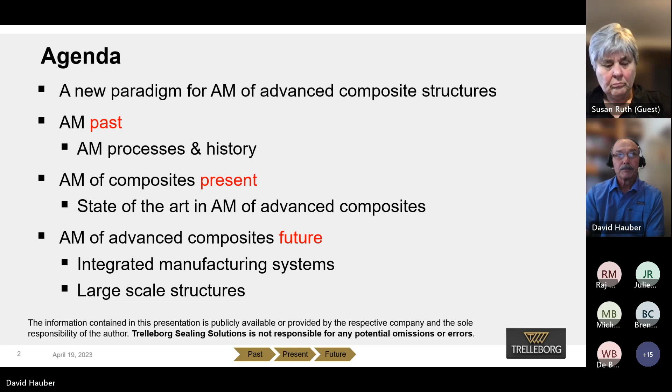Back in the late 70s, early 80s, I was an electrical engineer working in robotics research at Rensselaer Polytechnic Institute. Sikorsky came to us and wanted to know if we could use robots to make composites. I didn't know anything about composites, and it was a love affair. I couldn't believe the capabilities of composites, but the processes were awful - it was all manual layup at that point.

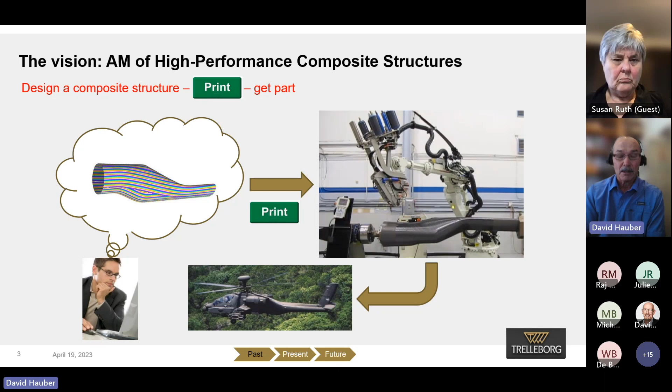So we spun off a company called Automated Dynamics, and my dream was to design a really cool composite part, push print, and get a part. I'm happy to say that after 40 plus years, we've made some progress here.

In the early days, handwriting, hand layup - this is what I discovered. The thermoset hand layup in the early 80s, and I thought, wow, there's got to be a better way than this. It was awful. So probably the best invention ever was the letterpress, which is simply a wine press and movable type, and it transformed the world.

Similarly for composites, it's manipulator-based, automated manipulation of the composites to make a structure. Then flatbed plotters or printers - with your computer, you can write a book or a paper and have it printed. Likewise, we can now print simple composite structures with automated fiber placement, especially with thermoplastics.

I quickly realized that thermoplastics were the future back in the 80s, and I'm happy that the rest of the world is finally agreeing. I think I heard a moan there.

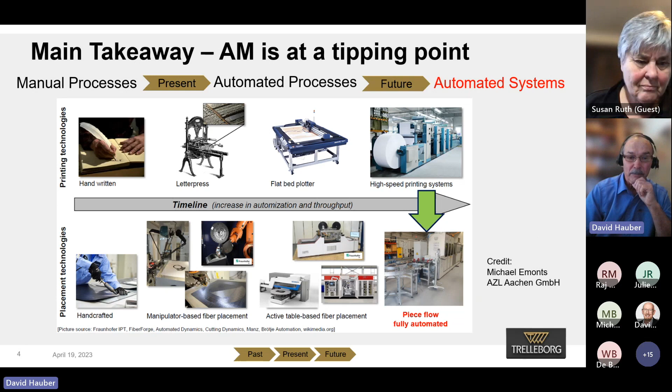A little history of additive manufacturing - I don't want to bore you here. These are the six original additive manufacturing technologies. I actually played a role in material jetting and directed energy back in the 80s.

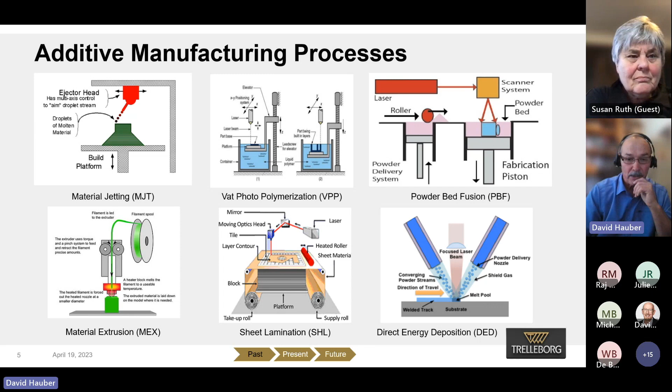These are the original patents from that time. I was working on this - I got an NSF grant to develop what's now called direct jetting.

I was doing a presentation at a conference, and this guy, Bill Masters, walked up to me and said, 'That's interesting, I have a patent on that.' And he did - it's amazing. So this is the original patent for what we now call 3D printing or additive manufacturing.

And these are the other technologies - Chuck Hull of 3D Systems with SLA, Carl Deckard with SLS, which was later acquired by Desktop, by 3D Systems. And Bill Masters invented fused filament fabrication.

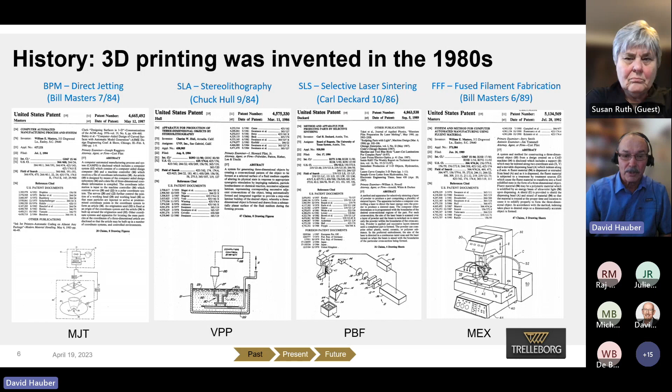So you'll notice a theme here - Bill Masters. Bill and I are still friends today. I handed over all my technology from this direct jetting, which I called BPM, and he named a company BPM and actually built and sold printers. It's no longer in business.

He also invented FFF, fused filament fabrication. A lot of people think that Scott Crump invented it, including Scott Crump himself, who thinks Stratasys invented FDM. The reason Stratasys says FDM and everybody else says FFF is because Stratasys trademarked 'fused deposition modeling' - it's the same technology, melting a filament and creating 3D structures with it. So by any measure, Bill is the inventor of additive manufacturing, and Wikipedia just recently corrected that.

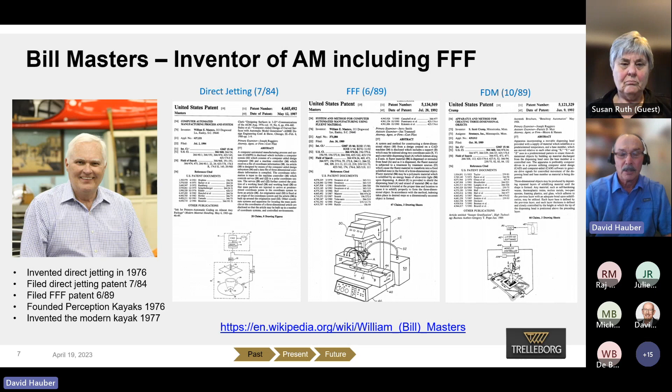Bill also invented the modern kayak - he just sold, a couple of years ago, his Perception and Aquaterra kayak companies. So then the last historical 3D printing technology is binder jetting.

Eli Sachs of MIT simply combined material jetting and powder bed fusion. Simply, I say, but it was a major breakthrough. I thought it was genius. He just combined these two technologies to solve problems with throughput and different materials.

With binder jetting, you can do everything from ceramics to polymers, metals. It just requires a secondary sintering step. You bind the powders together, then remove the unbound powder and sinter it. So it's not exactly push, print, get part. There are post processes, and so be it. It's still additive manufacturing.

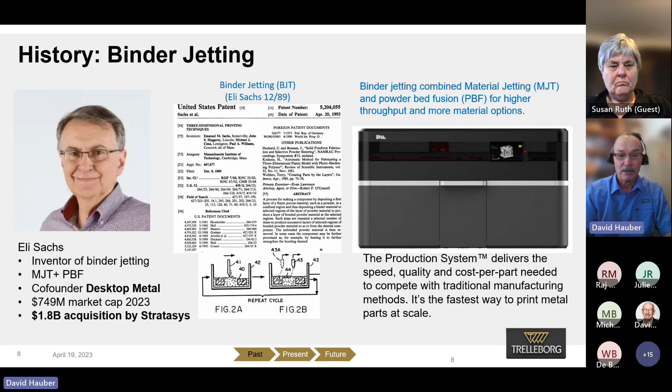Eli also co-founded Desktop Metal, which I'll get to in a minute. If you're following the news, Desktop Metal has a $750 million market cap, and they're being acquired by Stratasys for $1.8 billion. Their EBITDA is negative, so something I don't understand here, but it's a huge buyout.

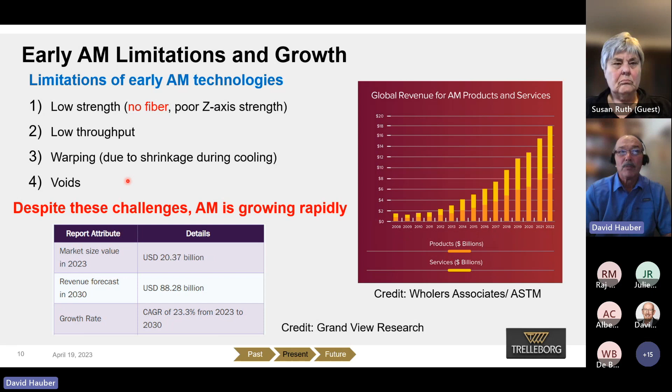So now we go into where we're at today with additive manufacturing of composites. Despite all the limitations that I saw early on, this industry is just exploding. It's growing at over 20% per year. It's a $20 billion business right now. However, it has problems: no fiber, poor Z-axis strength, relatively low throughput, warping, voids. But despite all that, it's growing exponentially.

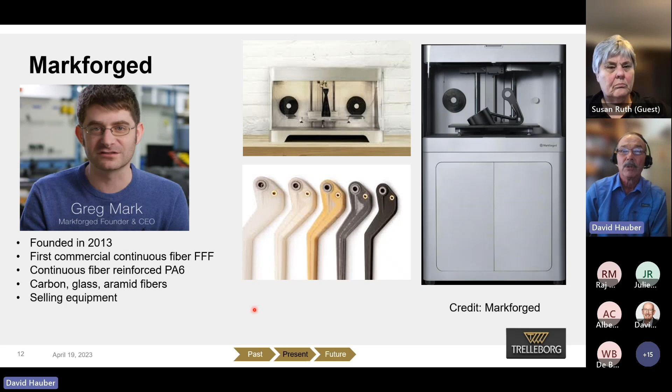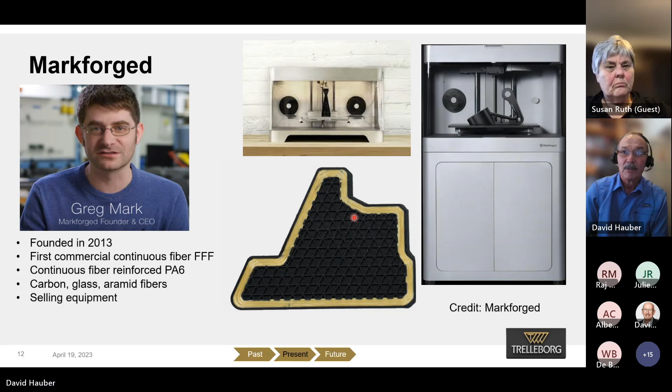Greg Mark was the first to introduce a fiber printer. Like I said, it's very low fiber volume. It has a very, very long minimum fiber length, and you can see us composite people understand that this isn't very pretty composites, but it's better than plain polymer or even chopped fiber.

So Arevo started making real in situ consolidated printers, originally founded by Hemant Bheda, but Sonny Vu, a Silicon Valley venture capitalist, bought them. They originally sold work cells, and now they only sell parts. They basically make bicycles with this technology.

They stole one of my engineers, and he designed a little mini in situ consolidation head with laser heating, and built these little work cells with a robotic arm. They can't make these bicycles fast enough. I'm told they have 72 of these work cells making bicycles in Vietnam, and they're expanding into other countries now. It's just amazing to me.

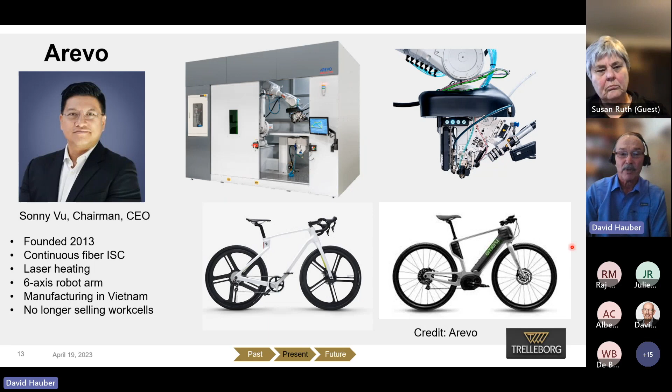I'm not very enamored with this e-bike here, but I kind of like this design. So it has a 3D printed frame, and this one has 3D printed wheels on it too.

Anisoprint is based in Luxembourg, and they started with really advanced FFF fiber reinforced printing in 3 dimensions, but now mostly they just sell 2D layered printers. They weren't making as much money with this technology as they are with this technology, so they're selling more or less printers, but continuous fiber though. They do have continuous fiber capability.

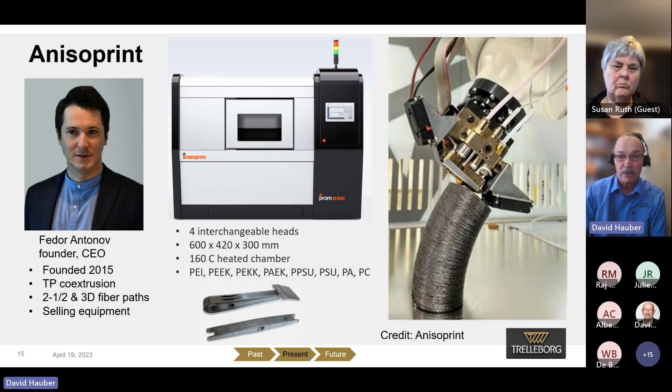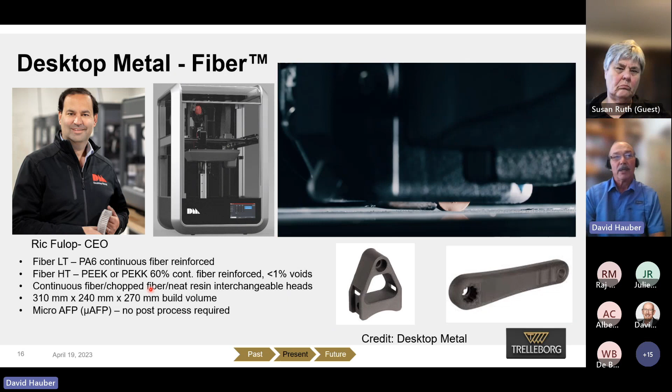So Desktop Metal, this is Eli Sachs' company. He was a co-founder with Ric Fulop, and they do mainly binder jetting, but they acquired a company called Make Composites that Konstantin Fetfatsidis created, and Konstantin helped them to build this printer, which we own one of.

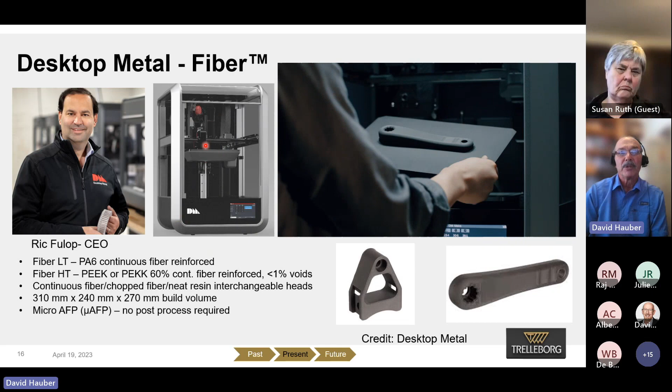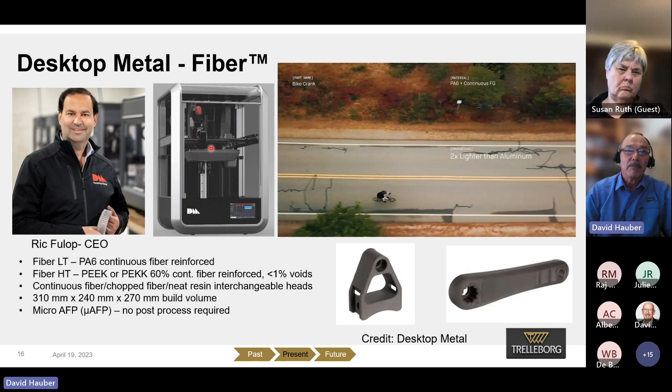It's at Albany, TSS Albany, formerly Automated Dynamics, and it has interchangeable heads. You can print FFF filaments, chopped fiber, or continuous fiber. It has like a mini fiber placement head, so it will print flat laminates anyhow with advanced composites.

And this is Konstantin here. He's been a friend of mine for many years, former SAMPE Young Professional of the Year. He left Desktop Metal. I'm going to just go back here for a minute. You'll notice that Ric is advertising his fiber printer, but he's holding a metal part here. Kind of tells you where his head's at, right?

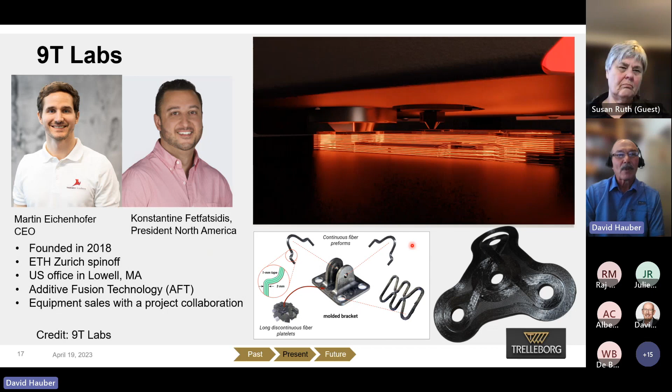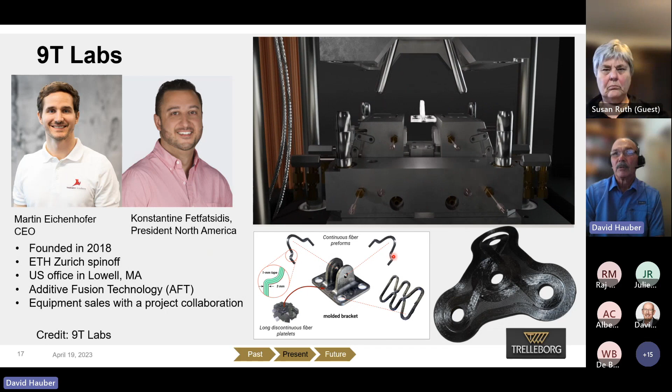So Konstantin wasn't happy with that metalhead attitude, and went off and joined 9T Labs. 9T Labs has a technology they call additive fusion, where they print continuous fibers, and then they take those fibers and drop them into a mold, and you can mold complex shapes by putting multiple continuous fiber composites into it.

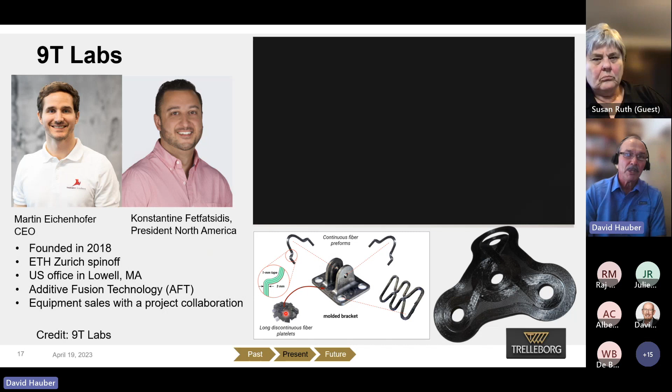It's very clever, actually. Like this bracket here, they mold these individual little pieces, put them in the mold, and then drop BMC in. And when the BMC gets compressed into these crevices, it pushes the continuous fibers in to get continuous fiber reinforcement in the structure. I think it's very clever.

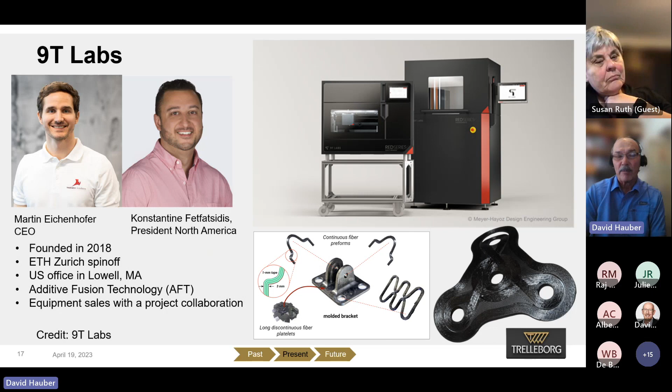Konstantin is North American president. He runs a lab and development center out of Lowell, Mass. So basically, they call it additive fusion. It's printing and then a fusion process, and they only sell equipment, but they do it on a consignment basis, where they help you with the process.

Orbital is FFF printing, co-extrusion. Basically, he puts fiber through the middle of an FFF head and then co-extrudes thermoplastic around it. Very artful designed machines. There was a news release just yesterday.

He has signed a $1.7 million contract with the Space Force to build antennas using this technology in space. Cole is a real space cadet. I'm sure you've seen him if you've been to a conference, because he goes to all the conferences. So it is basically just co-extrusion FFF, though.

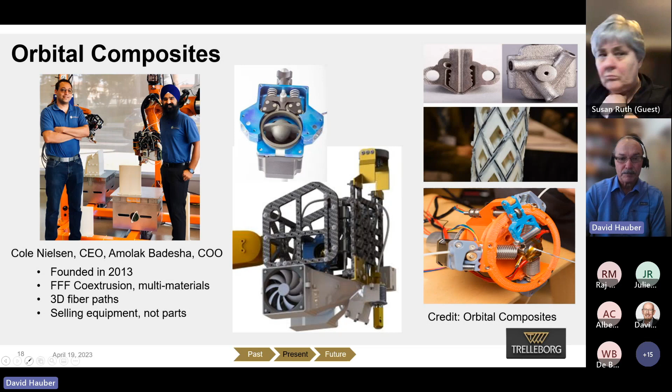Electroimpact with their SCRAM machine, scalable composite robotic additive manufacturing, is taking the basic FFF technology and integrating it with an in situ consolidation head. So this head has two FFF extruders and one continuous fiber in situ consolidation head with laser heating.

So this is printing with PLA, extruding the mandrel, and then in situ consolidating the composite fiber PEEK, carbon fiber PEEK structure over it, and then you can wash the PLA out.

And they're in the process now of upgrading this with a metal additive. So this is a Meltio system. It's a wire arc additive manufacturing head, but it's different - it's like a MIG welder, but it uses laser heat instead of electrical arc. So they're integrating the FFF with the in situ consolidation with metal additive and finished machining.

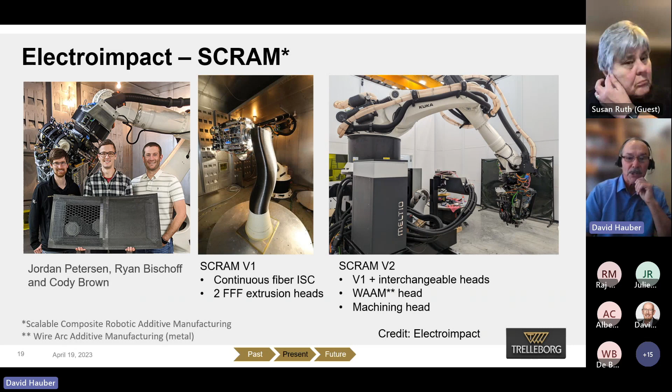I'm only going to do one of these chop fiber printers for brevity here, but CEAD also has an advanced tape layer system that they can integrate into these pellet extruders that they're making, chopped fiber pellet extruders. They claim this is the world's largest printer that they're installing right now in the AL Seer Marine facility.

It's on the scale of the Ingersoll machine, and it may be actually biggest by volume, but they also have the option to print continuous fibers with this machine.

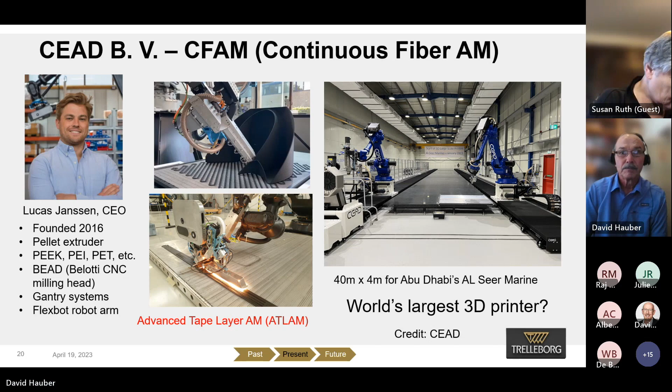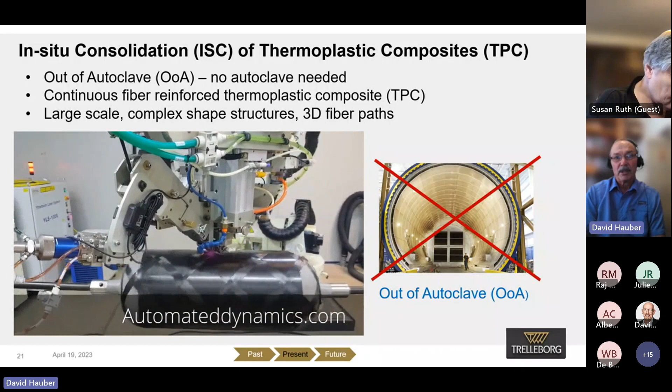And now we're at in situ consolidation. This is the technology that I helped to develop back in the 80s. Basically, you use laser - well, it started with hot gas, but now we use laser heating to melt the thermoplastic tape, and then robots to consolidate it on complex structures without an autoclave.

A little brief history of Automated Dynamics, now TSS Albany. We were acquired by Trelleborg about four years ago or so.

At RPI, we were using filament winding. Basically, what we did is we took a filament winder and with thermosets wound complex shapes, very similar to what MF Tech is doing today. MF Tech was acquired by Coriolis, but basically it's a robotic filament winder.

I quickly realized that thermoplastics were the future and built a prototype development system with hot gas heat for in situ consolidation of thermoplastic composites. We sold our first machine to ICI Fiberite. I have a hat from that era.

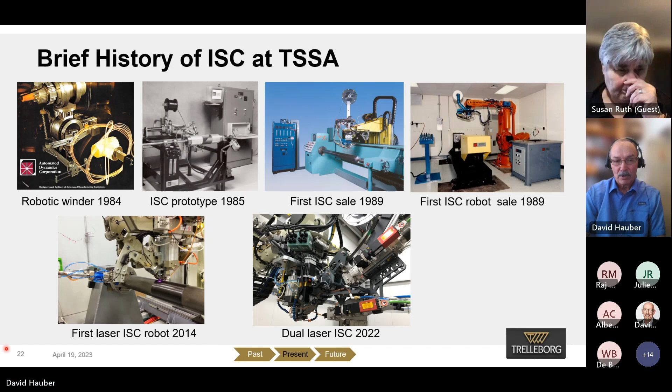So that's a brief history of automated dynamics. I'm not going to bore you with all the marketing stuff about what we do at Automated Dynamics or TSS Albany, but everything we do is in situ consolidation.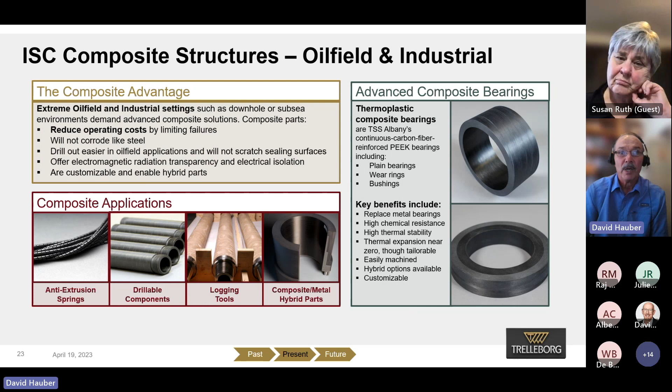We don't do any other process other than thermoplastic in situ consolidation, including fuselage structures where we fiber place the frames and stringers, assemble them into the mold, and then in situ consolidate the skin over the outside to co-bond it into a complete fuselage structure.

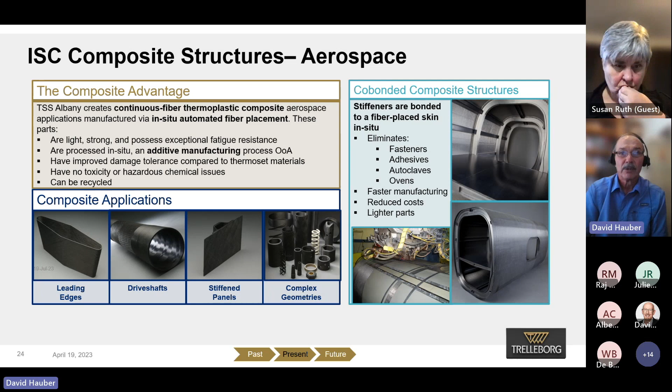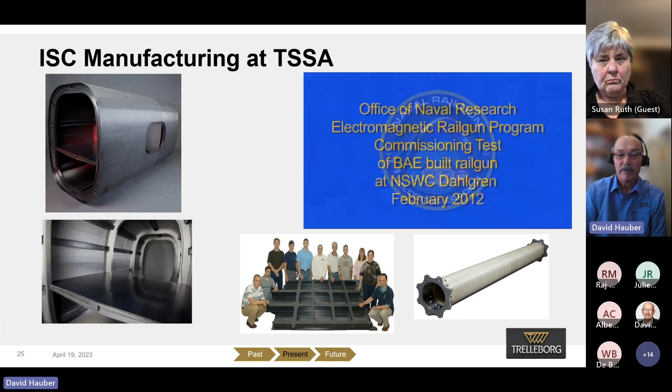Or other structures, like for example, this is a floor panel for a helicopter. We do drive shafts, all kinds of stuff, including a rail gun that we've been making for the Navy, which has over a ton of IM7 PEEK on it.

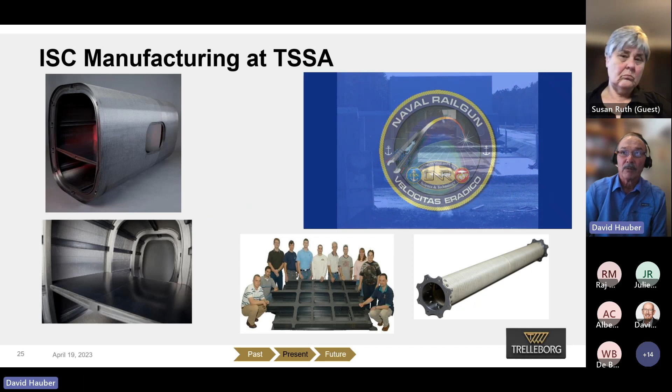You just can't make a structure like this with any other technology other than in situ consolidation, because it's a really thick wall structure. You get no marcelling, and you can build it up one layer at a time, very easily.

So like I said, everything we do at Automated Dynamics and TSS Albany is in situ consolidation, including these e-glass polypropylene pressure vessels. We sell these by the hundreds.

Various structures. If you ever see pipes by the side of the road with these bands on them, that's our technology, putting those reinforcement bands on. That little band of e-glass polyethylene increases the pressure rating of that pipe by a factor of 3.

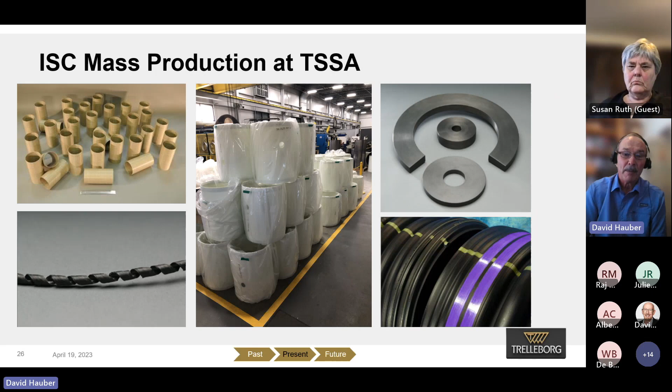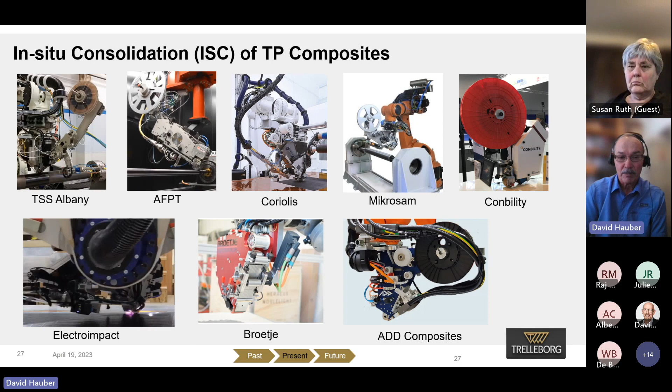So Albany is not the only game in town now. A lot of people are doing in situ consolidation: AFPT, Coriolis, Mikrosam, Conbility, Electroimpact. I'll get into these in more detail.

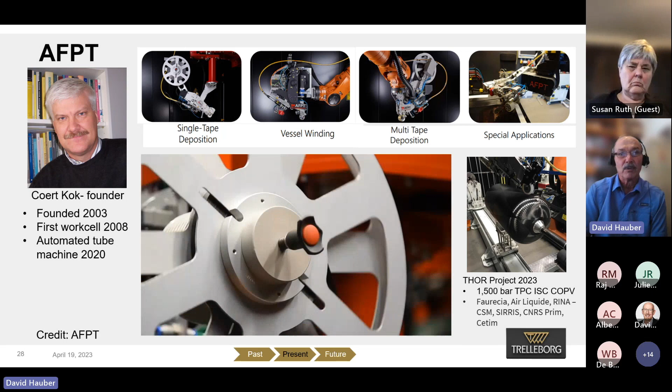So Kok saw what they were doing at Boeing St. Louis and went back, and with help from Fraunhofer developed a technology to laser in situ consolidate thermoplastic composites. He's doing a lot of work right now in everything from pressure vessels to this machine here.

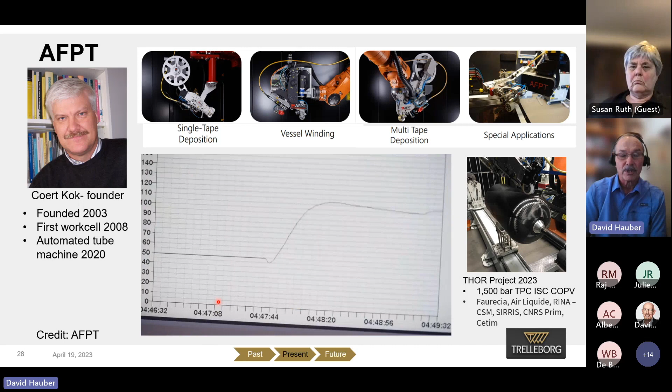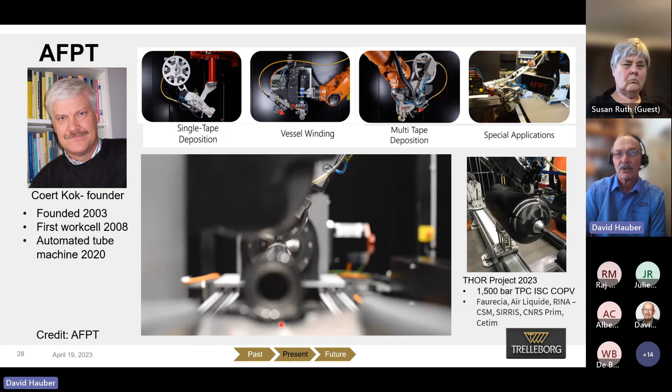I'm not going to show you this whole video, but this machine fiber places, in situ consolidates a tube, extracts the tube and cuts it into little cylinders that are used for rotor overwinds or rotor sleeves for high-speed electric motors, all automatic.

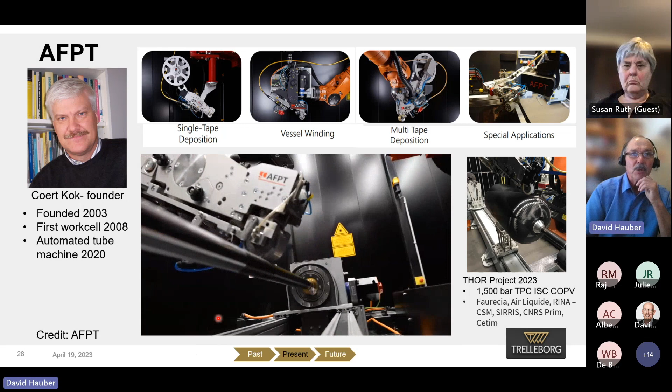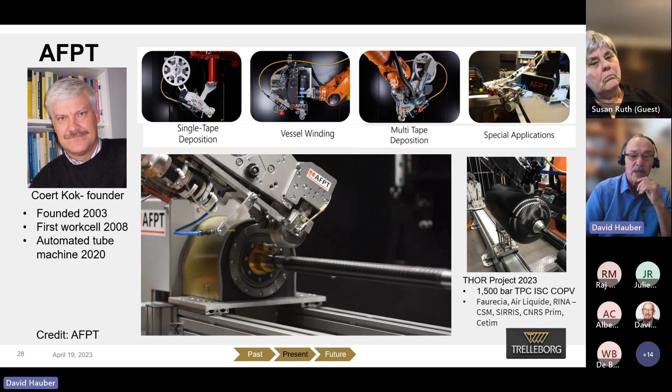It's multi-process. It's not just fiber placement, it's not just in situ consolidation. It's an integrated work cell that makes parts for electric motors.

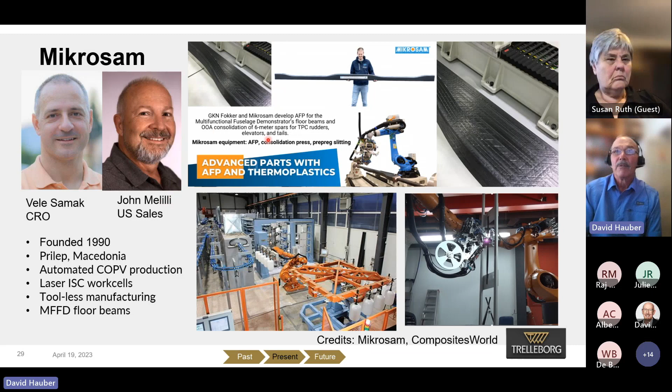We probably all know John Melilli. He's now the U.S. sales rep for Mikrosam. They have been doing all kinds of things, including in situ consolidation. They started with filament winding.

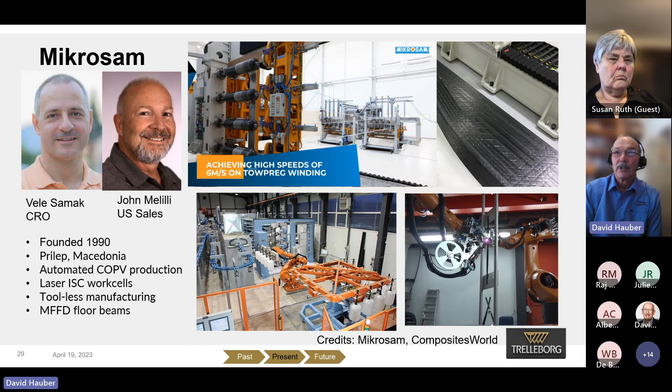They make pretty much everything in the composites world right now. There's a nice article in Composites World about this beam that they made for the multifunctional fuselage demonstrator for Airbus.

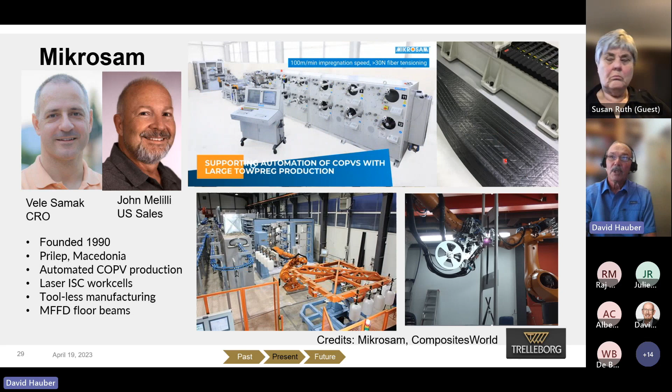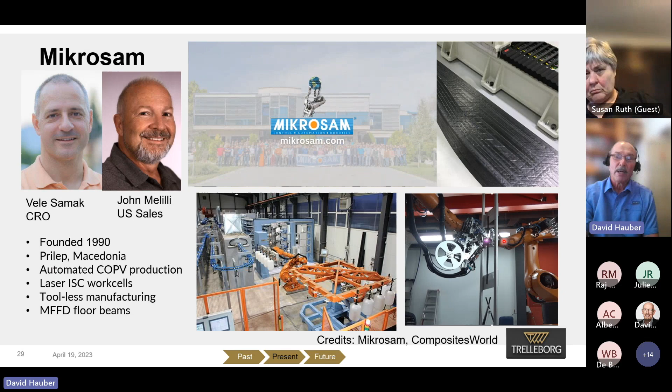Including toolless manufacturing, you can make structures without a tool by using one robot as the tool and the other robot as the fiber placement technology, and they do complete automated work cells.

This is basically a lights-out COPV manufacturing facility where everything is automated, and Roth sells something very similar to this.

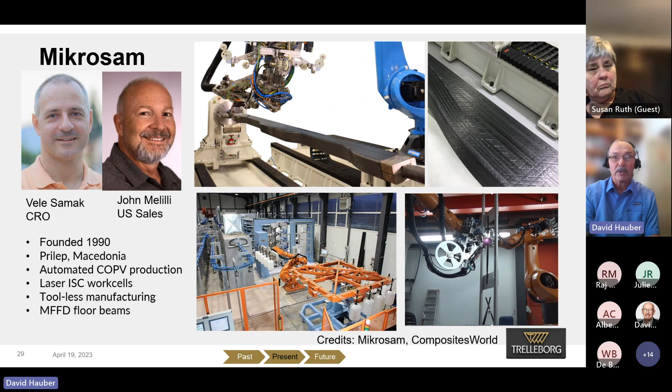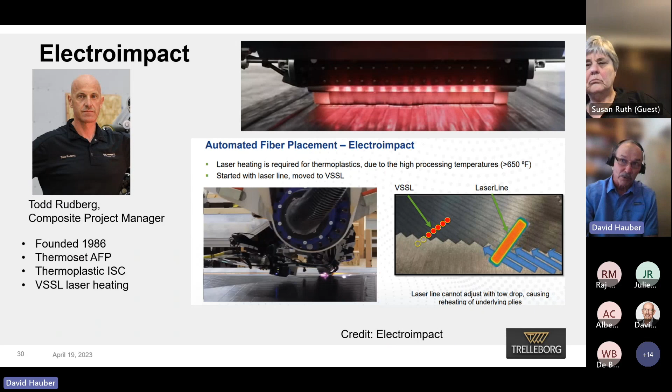Besides these massive thermoset machines, they also have thermoplastics besides the SCRAM technology I just showed you. Broetje is another company integrating fiber placement into work cells. This is a completely automated work cell making parts for aircraft.

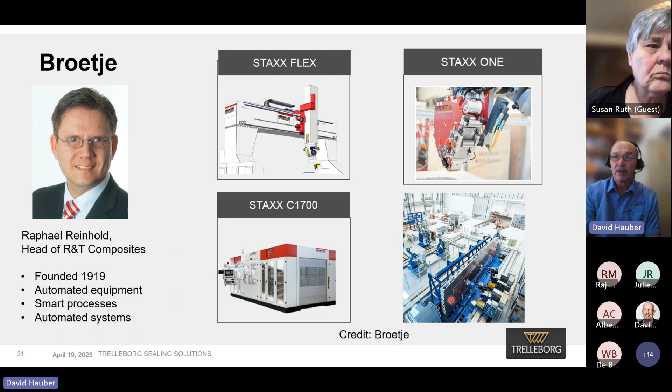They have work cells and completely automated factories. And the new kid on the block is Add Composites.

I would suggest you go to his website. He has a really excellent learning center. He puts a lot of work into teaching others about composites, especially fiber placement and in situ consolidation. He's using a Humm3 Heraeus heat source here. It's visible light rather than laser. The advantage is you don't need a class 4 laser environment. You can do in situ consolidation without a class 4 enclosure.

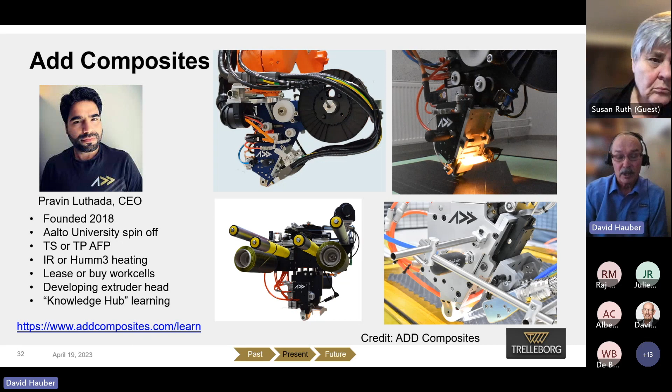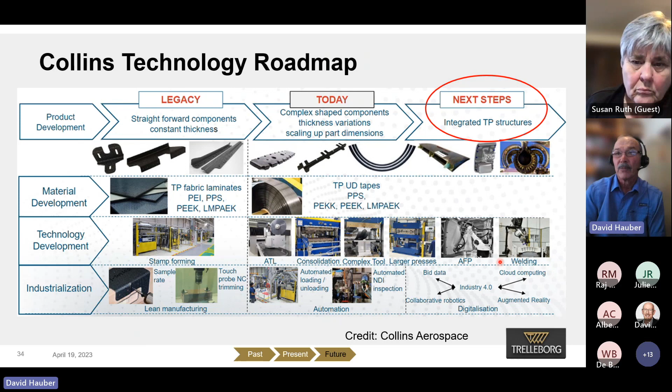So where are we headed from there? Very quickly, this is the Collins view. Next steps are automated fiber placement, welding of structures together, automation of the whole process.

This is Airbus's vision here, and if you want to know about that, read Ginger Gardner's article in this month's Composites World. She has an awesome article about this technology. She really outdid herself explaining all the different technologies they're using in this multifunction Clean Sky 2 fuselage demonstrator.

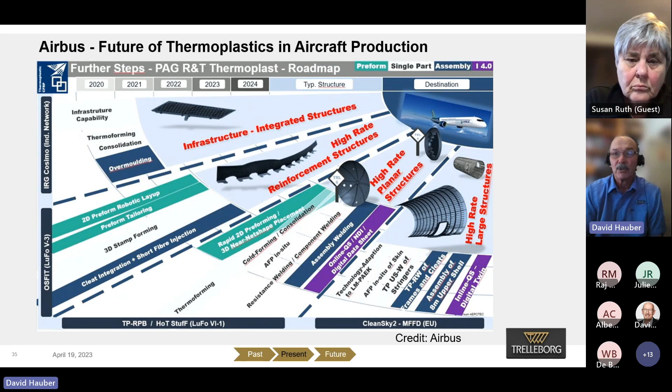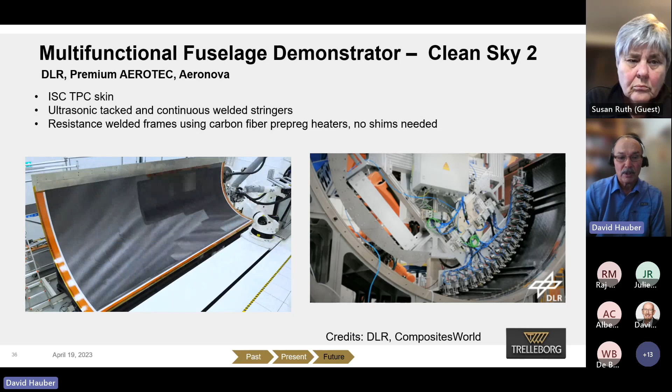This is the upper fuselage of that, which Ginger's article explains really clearly. It's in situ consolidated skins, and then they ultrasonically tack and bond the stringers in, and then resistance bond the frames. So it's all automatic.

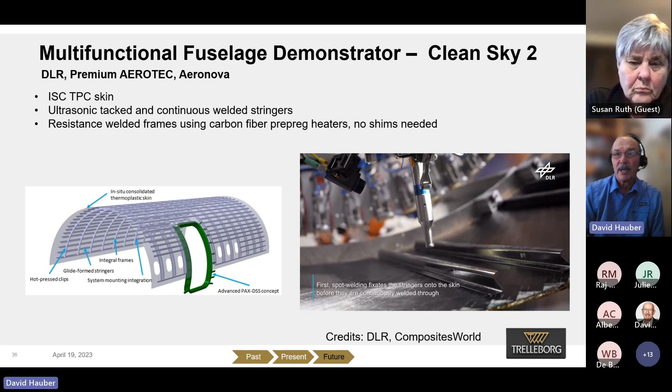This is where this is heading. This whole process can be automated now. It's not just fiber placement, not just in situ consolidation. It's automated manufacturing of the entire fuselage structure.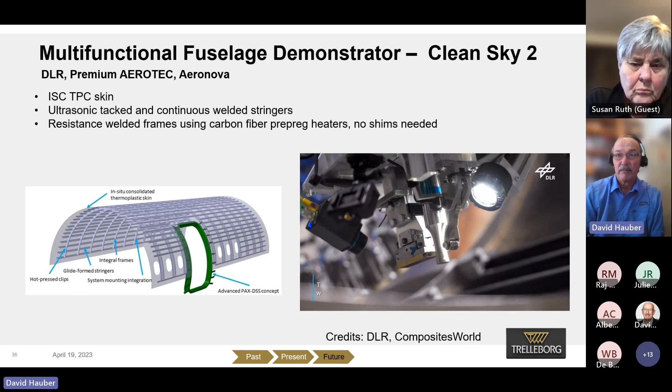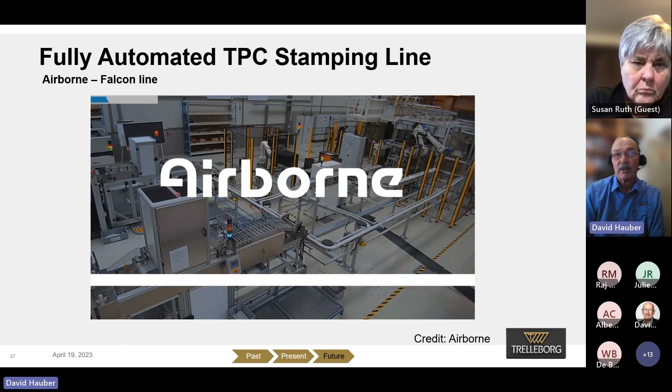I'm convinced this is what the next narrow body jet's going to look like. It's going to have some of these technologies integrated together to make an autoclave-free, no rivets or minimum rivets thermoplastic composite structure. You can see these videos on YouTube, it's worth watching. This is an Airborne, completely automated manufacturing line.

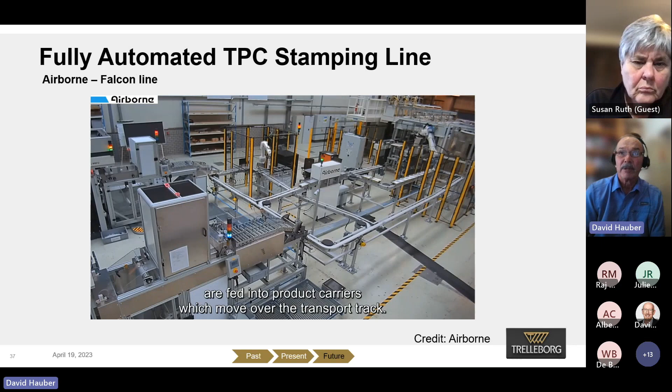It's stamping, but it's fully automated. I would contend that this is additive manufacturing. It's lights out, make the whole structure automatically, and all you've got to do to change the part is change the molds and the program, right? So I think that's additive manufacturing.

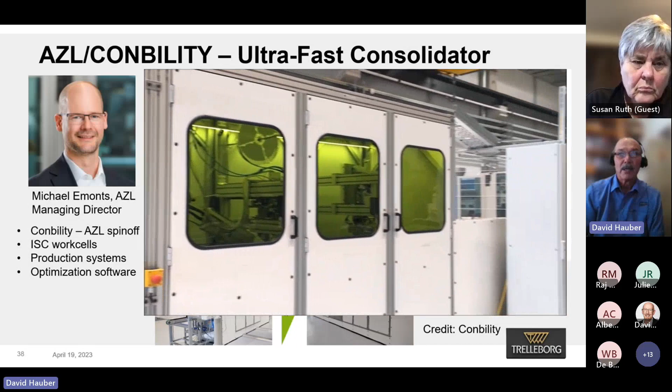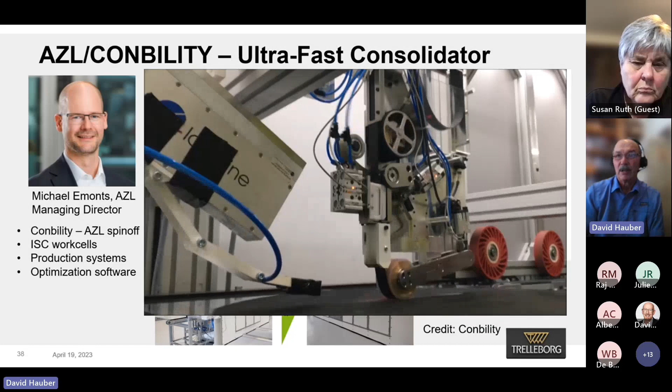Now back to Michael Emonts. This is his Conbility ultra fast consolidator line. He basically has separated the operations into a continuous process. So it very rapidly makes an entire structure, starting with in situ consolidation and then stamping.

So in summary, the additive manufacturing of advanced composites has gone from small structures to large structures, and now we're at the tipping point of going from single processes to integrated manufacturing processes for complete composite structures. And I even made the timeline.

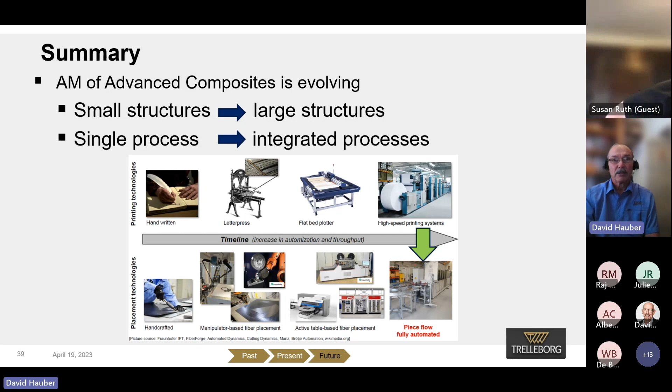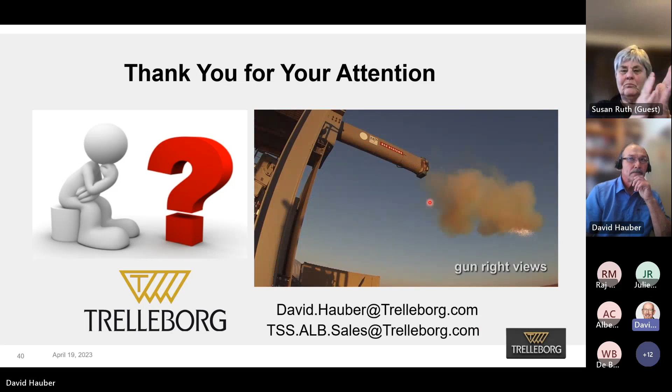Yeah, great, thanks, thanks David. Excellent presentation, really great. Any questions, either if folks want to shout up or raise your hand, either way?

I guess I'll jump in with one, David. One of the challenges I think with thermoplastic kind of additive in situ is both the deposition rates to get full consolidation, and then for any of the semi-crystalline polymers, controlling the cooling. Do you think we'll always need a secondary operation to get decent rates and full consolidation, or do you think we can achieve full in situ?

Well, we do full in situ every day for everything we do at TSS Albany. However, there is a knockdown. We are currently not getting, at least for high performance polymers like PEEK, and no one else is either, getting full consolidation. So it's more like 70-80% of interlaminar shear at reasonable rates.

And you can get low enough voids for aerospace, but the main problem, and the crystallinity, can be dealt with also. We do what we call ghost passes, where you go over the structure later with a laser at lower speeds and raise the temperature up to the crystallization temperature. There's actually a benefit in that, because people don't realize this, but about half the shrinkage of a crystalline thermoplastic composite is the crystallinity. A lot of the shrinkage occurs in crystallization, not just CTE.

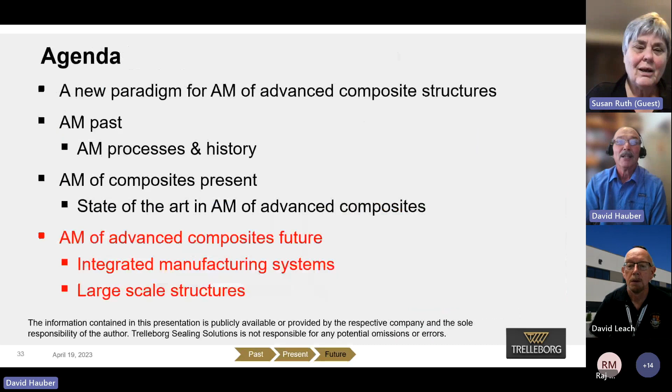Way back at the beginning of your presentation, you had a chart that showed specific strength and specific modulus for the composite. Is that unidirectional? That's uni, yeah.

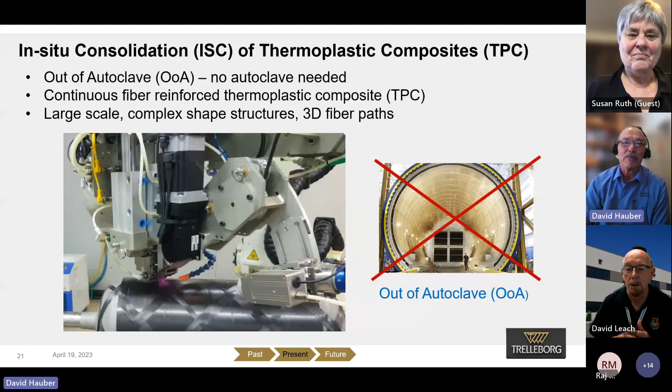I should have added that for this group, but I sometimes include black aluminum, which just knocks it down by half, basically.

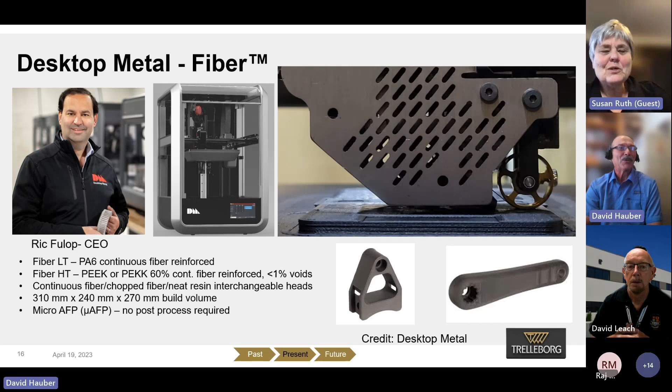And then I think Mike was next. Mike Buck. Dave, great presentation. Thank you. I had a quick question on the in situ consolidation process. You talked about the wide body, or the small body aircraft, as part of your presentation.

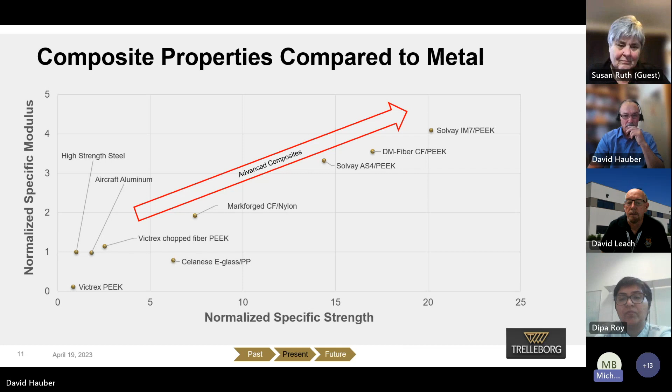I know a lot of folks have been looking at a two-step out of autoclave process where they'll use a rapid lay down of material that's not fully consolidated, followed by an out of autoclave or oven consolidation. What are your thoughts as far as, in situ consolidation would be best, but it's slower. How is that going to finally shake out?

I believe that unless I can make some of my ideas reality, it will be a secondary process. You're not going to fly an airplane that's at 80% of the properties. When you can oven consolidate it, it won't be autoclave though.

I believe that like the bottom half of the multi-function fuselage demonstrator, it's rapidly laid up and then oven consolidated. That's probably what's going to happen for the next generation. Thanks.

And Dipa, you have a question? Thank you for the excellent presentation. I just have one question: will there be a crystallinity variation across the structure, a crystallinity gradient? Is there any way to measure that and how will it impact the final performance of the part?

The thermal gradient across the structure? The crystallinity gradient, the crystallinity development. Oh yes, that can be measured with a DSC, by sectioning it.